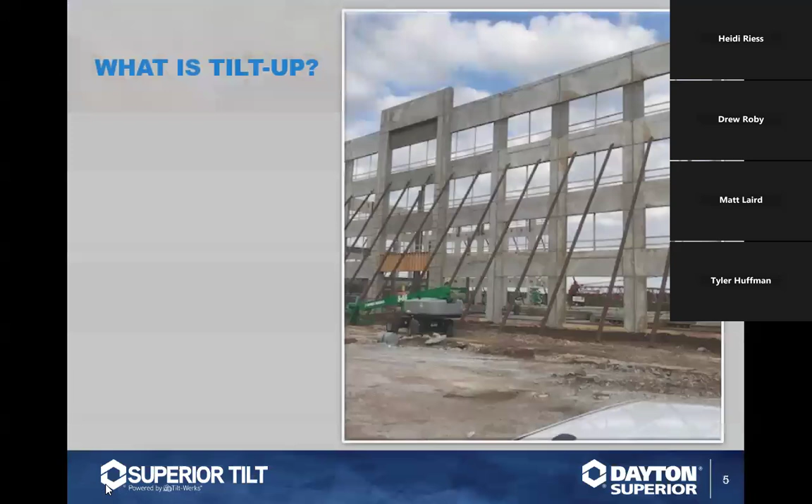All right, thanks Drew. First, let's take a look at what is tilt up. On a tilt up project, the wall panels are cast on site, and a crane is utilized to lift the wall panels to a vertical position and set them into place. This method of building construction offers both effective and innovative ways to build.

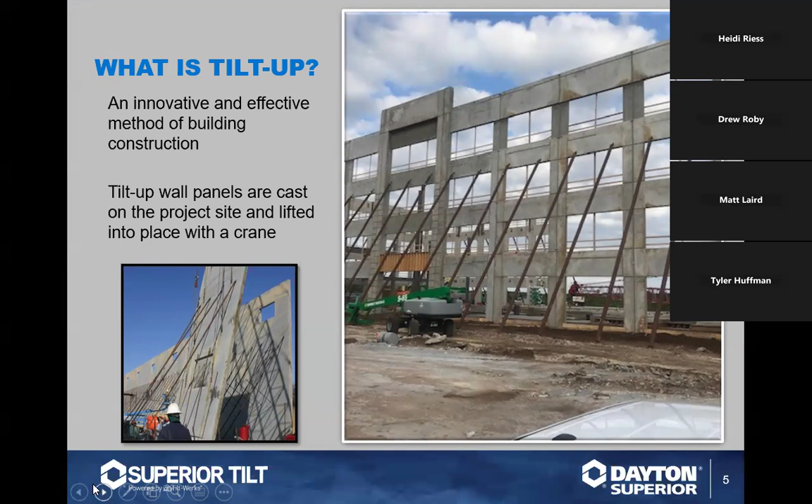Tilt-up method of construction can be used to build a large variety of building types. Generally speaking, tilt-up projects will typically fall into one of a handful of categories. These categories include distribution, manufacturing, churches, schools, and multi-story structures.

Tilt-up method of construction is a very popular choice for schools and educational facilities as well. This includes elementary, middle, and high schools, as well as charter schools and colleges or universities. And finally, multi-story facilities offer multi-use office and multi-use flex space.

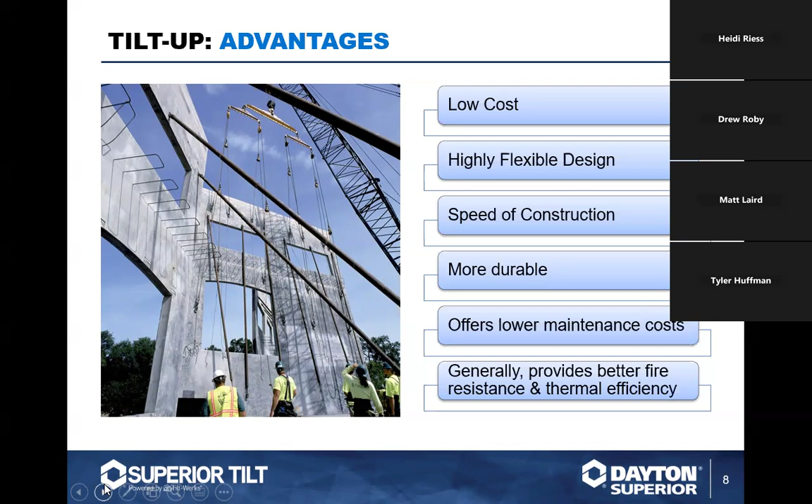There are many advantages for choosing tilt-up as a method of construction for a project. Some of these advantages include speed and cost, as well as design flexibility and overall durability of the structure. Buildings and structures built using the tilt-up method will generally provide a more efficient thermal rating, as well as increased fire resistance.

All tilt-up projects follow the same general process. First, the foundation and floor slabs are poured. If there are any temporary casting beds required, these will typically be poured at this time as well. After these items are poured, they are allowed to cure.

Next, the forms for the panels are built and bond breaker is applied. After the bond breaker is applied, the process of installing rebar, embeds, and inserts can be completed. Once these items are installed in the forms, the panels are now ready to be poured.

After the panels have been allowed to cure, the forms are stripped, braces are attached to the panels, and the wall panels are lifted and set into place. Once the panels are positioned in their final place, they can be temporarily braced off. Braces should remain in place until all required structural connections are installed.

Dayton Superior has been involved in the tilt-up industry for over 60 years. Dayton has been a major contributor to the Tilt-Up Concrete Association. Since the founding of the TCA in the 1980s, Dayton Superior has supported the TCA and continues its support and membership to this day. As the popularity of tilt-up has grown, Dayton Superior as a company has also grown.

Over the years, they have acquired industry-leading technologies such as AccuBrace, Tilt-Werks, and HK Composites. AccuBrace provides an engineered solution for bracing panels to helical ground anchors. Tilt-Werks offers engineers, architects, and designers a total and complete tilt-up panel design package. And HK Composites provide a full fabrication insulating system for tilt-up panels.

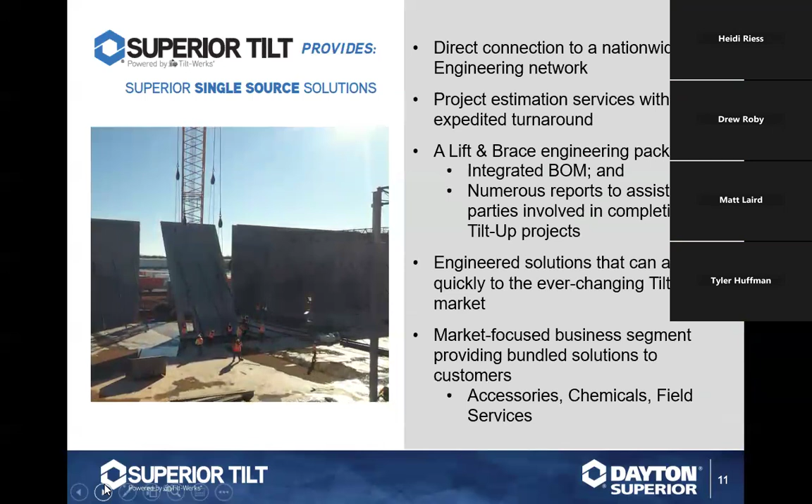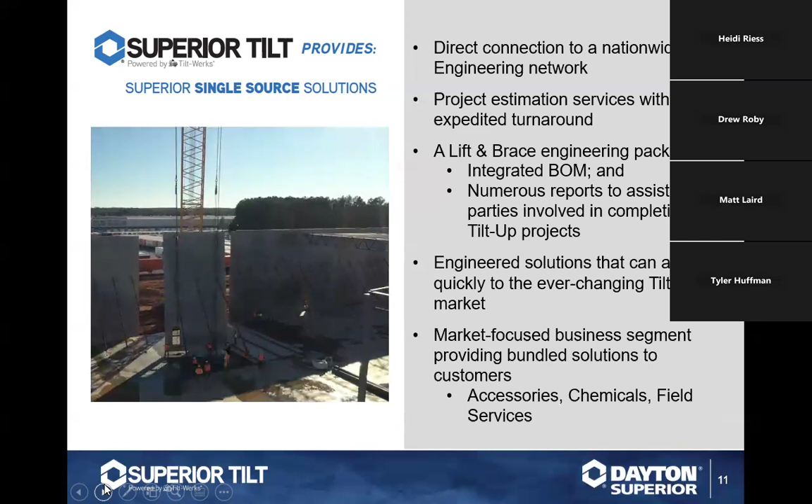The Superior Tilt Team offers our customers a direct connection to our engineering network. The engineering network can provide assistance from early bidding and estimating stages of a project and continue their support by providing a complete lift and brace engineering package. Again, the goal of the Superior Tilt Team is to provide a single source bundled solution for tilt-up projects, beginning with the estimating process, continuing through engineering and material delivery, and all the way through job site solutions and support.

A key component of the tilt-up process is the temporary bracing of wall panels. Wall panels can be as short as a few feet in height, as tall as 90 feet, or anywhere in between. To brace these wall panels, Dayton Superior offers our T14 braces.

Our T14 braces offer industry-leading capacities and are available for rental or purchase through Dayton Superior or one of our authorized tilt-up dealers. Dayton Superior can provide our authorized dealers hands-on training for both maintenance and inspection. This is going to ensure all braces rented or sold meet required specifications.

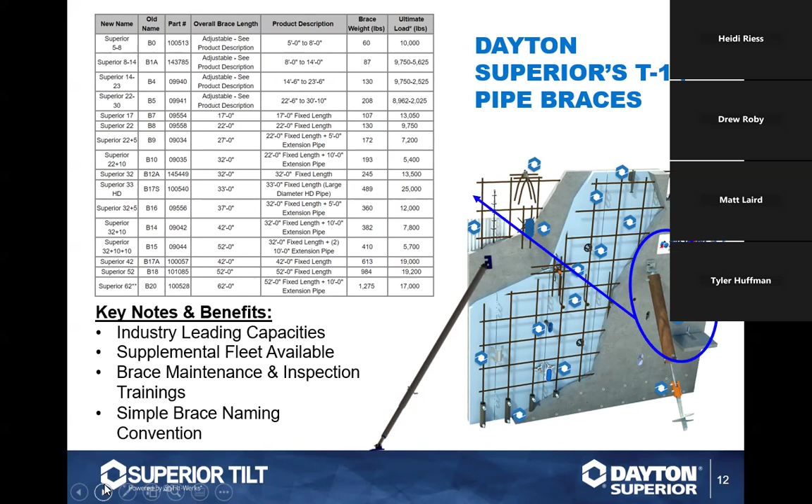An often overlooked component on the T14 braces is the wall and foot plate. These plates provide a connection point to the wall panel and the floor slab. These plates are often referred to as brace shoes.

Generally speaking, the majority of our T14 braces come with a standard one-hole wall plate. However, a two-hole option of the wall plate is available for some of the larger braces. The two-hole wall plate option allows for an increased ultimate capacity of the bracing system.

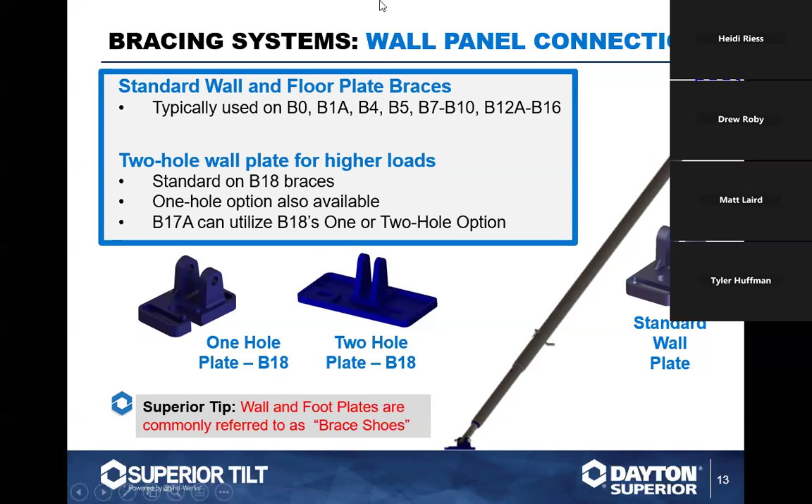Now, Tyler Huffman, Dayton Superior's technical sales representative in the Northeast, is going to talk to you about some more products from Dayton Superior's tilt-up portfolio.

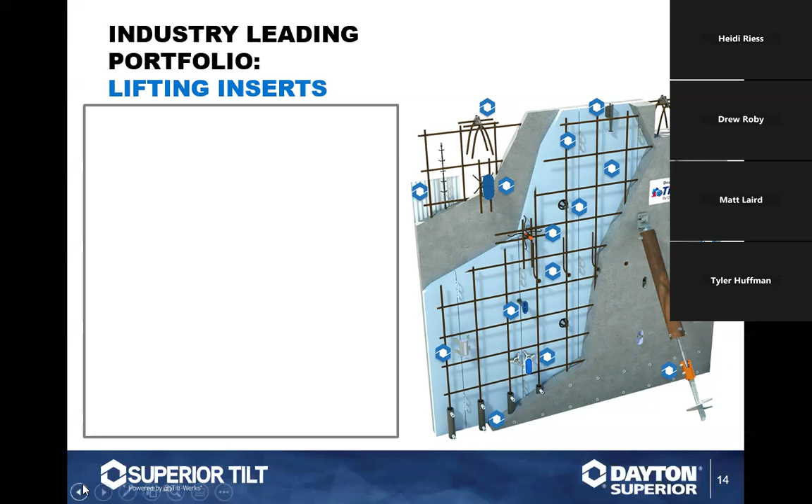Thanks, Matt. All right, first off, we're going to take a look at the Dayton Superior lifting portfolio. For tilt-up, you're going to have your two basic face lift inserts, and that is going to be the T110 and the T275. And then we also have the P92 FEW, that's going to be your edge lift insert. And these are all paired with the same clutch, and that is our T120 lifting clutch.

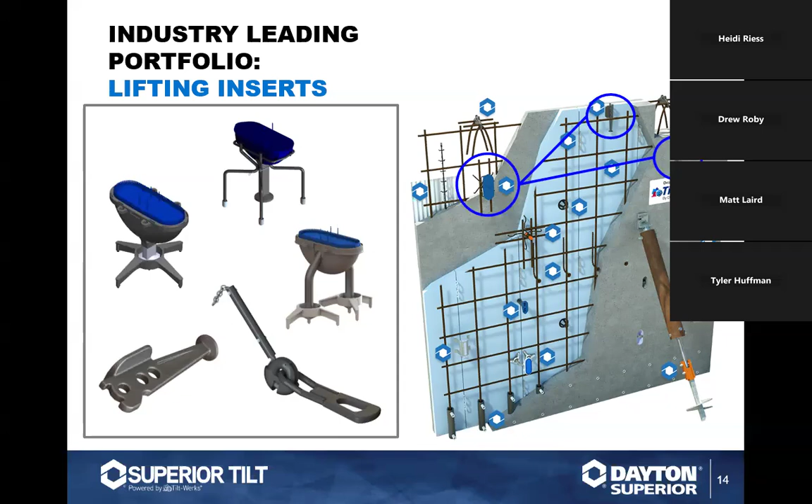Looking at the T110 and the T275, one of the things that makes the T275 pretty popular is its innovative void former. It's made of a plastic void former, so basically the gray part of the void former, or the bottom, is going to stay right in the panel. You pop the blue lid off, and this gives you a nice clean edge to slide the clutch in for lifting. And those are going to cover panel thicknesses of 7¼ inches and greater.

The T110, this is a single forged foot anchor, and that's got a 4-leg wire base. That has a plastic void former, easy to locate as well, and that's going to cover from 5 inches and greater. And that gives you easy tie-off points on the bottom of the insert to tie into the rebar.

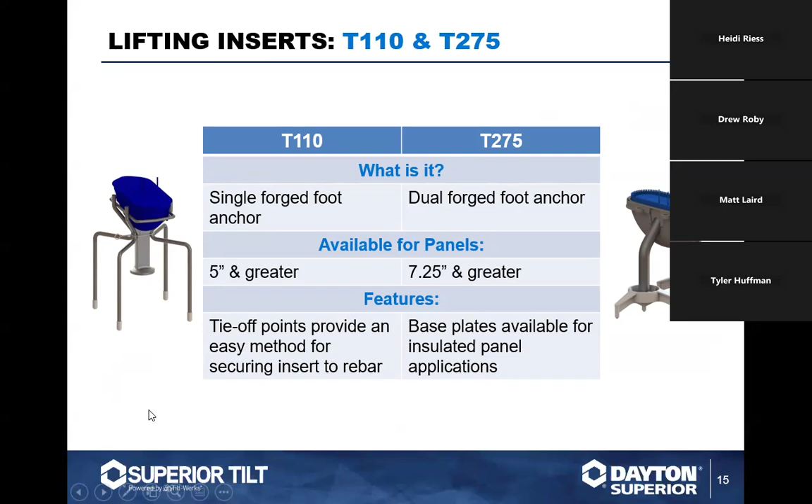Also, to pair with these inserts, we have the T275 patch cap. That's your oval patch cap, and it will snap onto either the T275 or the T110. We also have the P99P, a circular patch cap that can be used. The bottom photo shows a brace insert patch cap, which we'll get to in a little bit.

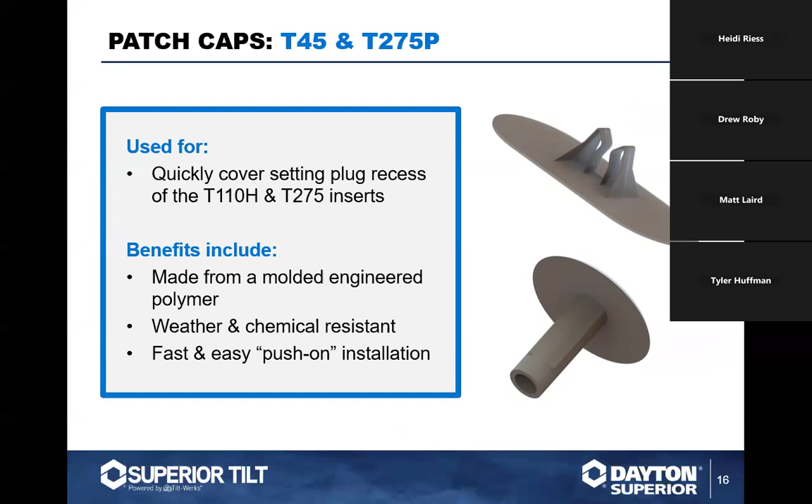The P92 FEW, your edge pick insert, is what you're going to use for edge pick or if you need to plumb set for a tilt-up panel. The design of this insert typically eliminates the need for a shear bar, and it's available in plain or hot dipped galvanized finish.

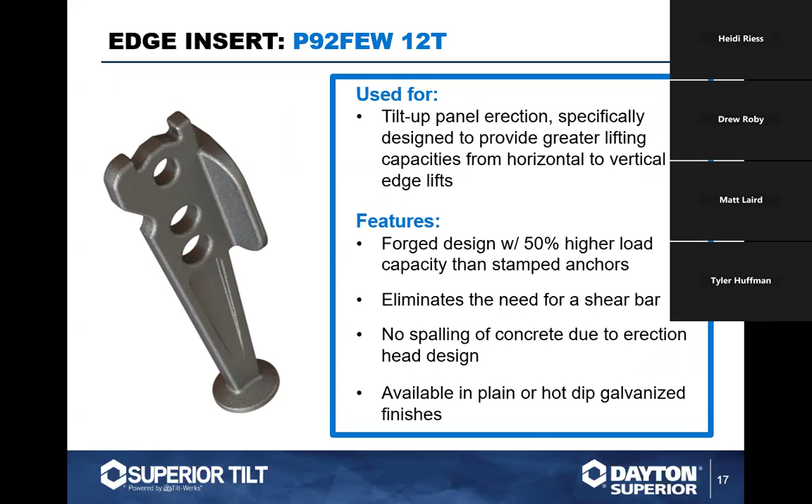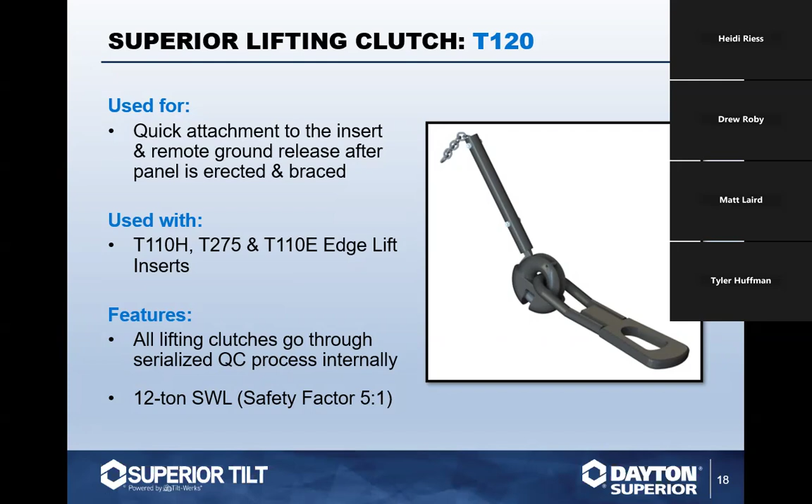Moving on to the T120, this is going to be your main lifting clutch for tilt up. It will handle all the inserts: T275, T110, and the P92 FEW. This is obviously a ground release clutch. These are also serialized and go through a very rigorous inspection process every time before they're sent out of our warehouses.

We'll move on to the brace insert portfolio. We basically have two main brace inserts. The first being the T6A Heavy, a 3/4 inch coil insert with an ultimate load of 28,500 pounds. This is furnished with a T21 locator plug, making it easy to locate in the panel, and these can be furnished with plastic tip feet or stainless steel feet on special request.

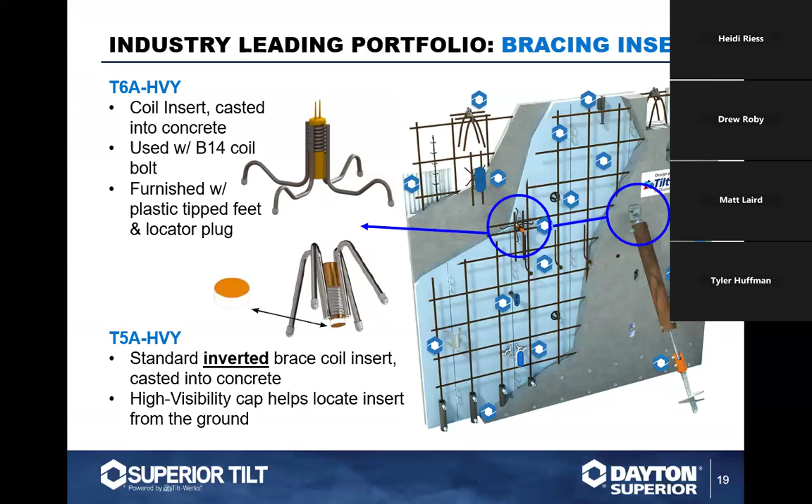Moving on, we have our Bearcat bolt. We offer a single-use Bearcat and a multi-use Bearcat bolt. The single-use has a silverish blue hue color to it, and the multi-use is more of a brass or gold color. It's an easy way to tell them apart.

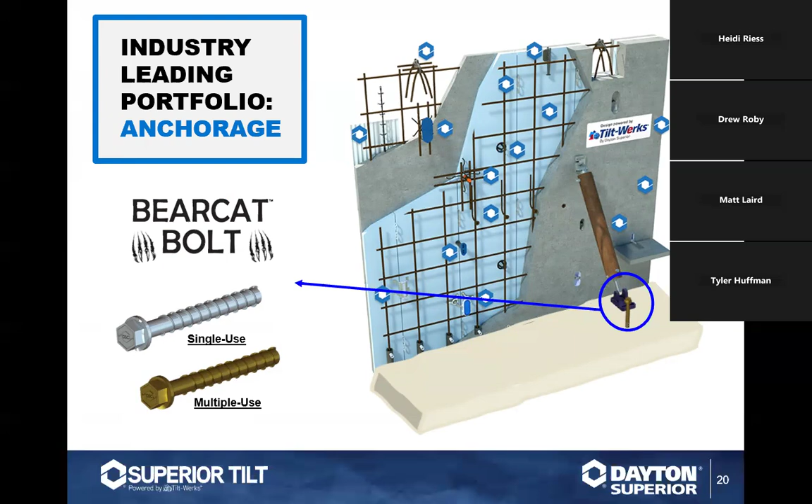We recently completed ACI 355.2-19 testing on these for cracked, uncracked, and seismic conditions, and all of those calculations are available on our website. The Bearcat bolts, both multi and single use, are available in 5, 7, 10, and 12-inch lengths.

We also have a thread depth gauge for the multi-use. If you thread it onto the bolt and the bolt does not protrude the bottom of it, those threads are still good. If it does show, then that bolt needs to be replaced.

We also have the classic T13 tang bolt, available in 4.5 or 6-inch lengths. Each kit includes the bolt, cut washer, and one tang, and this can also be used to secure braces to the slab.

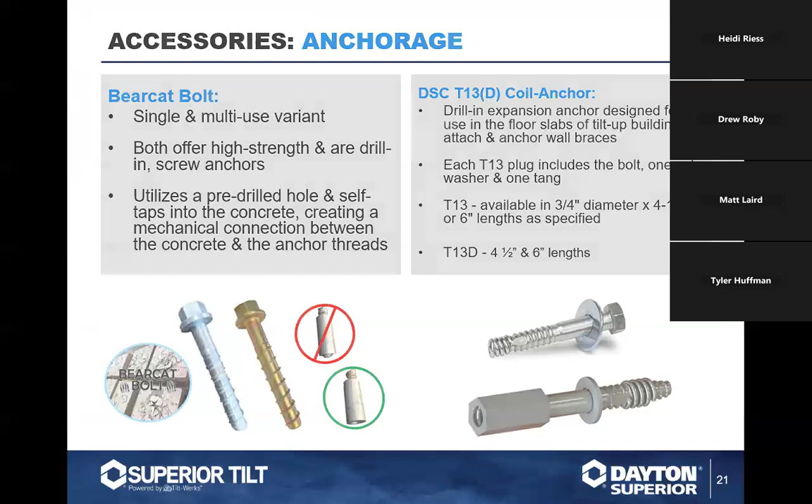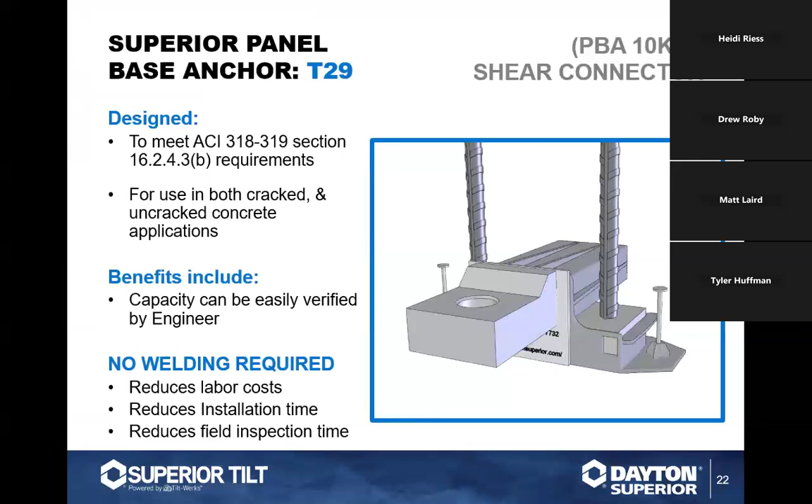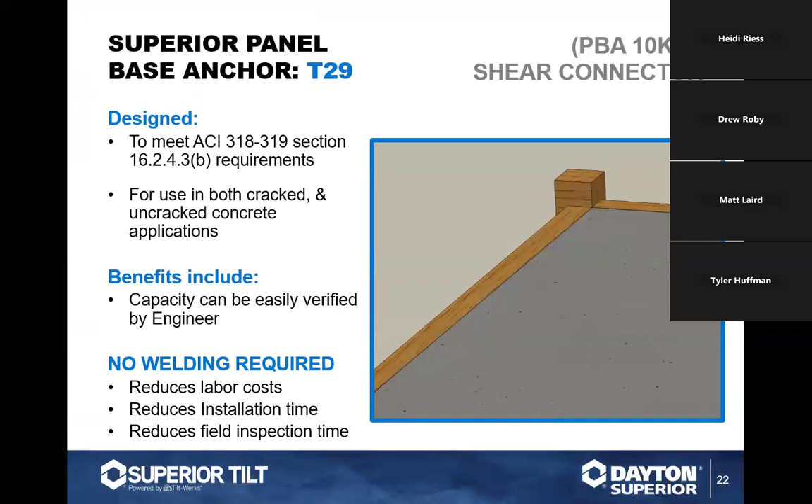Moving on, we have our T29 panel base anchor. This is Dayton Superior's version of a panel base anchor, a 10,000-pound connection. These are approved for seismic conditions A through F. As you'll see in the video as it plays, with the way ours is installed, it is a straight down anchor, so it does not compromise the rated anchor strength caused by angle installation.

There is no welding or patching required, and this utilizes our 12-inch Bearcat. These are sold as a kit - you'll get the void former, the bar, and a Bearcat bolt.

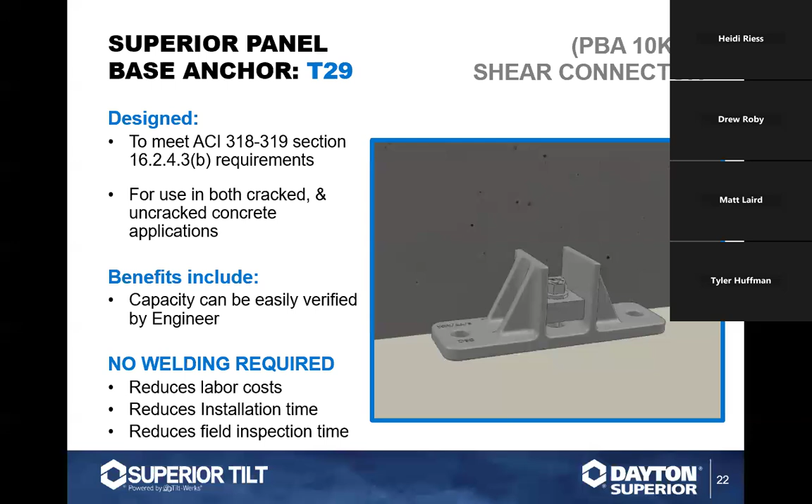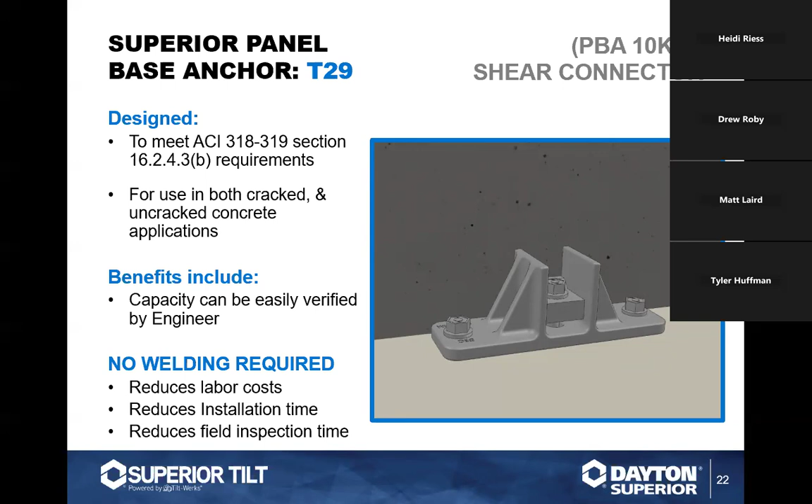If there is a need for additional shear capacity, we do have, as you can see now, the shear connector. That would require 2 more Bearcat bolts. This can reduce a lot of labor costs - as I said, there is no welding or patching required. It's very discreet and easy to install.

Moving on, we're going to get into some of the accessories we offer. Insulated panels are becoming a pretty popular thing as we try to keep up with environmental standards.

In January, Dayton Superior acquired HK Composites. We offer the CA tie, the four-prong tie, which is available for composite panels. And the ST tie is the standard non-composite panel connector.

We do offer full fab packages for these kinds of projects. That means when the insulation shows up on site, it's already cut to each panel as well as drilled or slotted for the ties. Basically, it shows up on site ready to go. You place it in the panel, put the ties in, and then pour your concrete.

We also still offer the Delta tie for composite panels and the Yeti pin.

Other accessories available include the Aztec EZ Connect PSB, available from heights of 3/4 inch to 3 inch, in 2.5 foot, 5 foot, and 10 foot lengths, along with the Aztec EZ Set Chair, which fits rebar sizes 3 to 10, with heights available from 2 3/4 to 14 inches in 1/4 inch increments.

Moving on, the Superior Plate Dowel system. This is a two-component system used to transfer loads at the joints of concrete slabs. We offer 1/4 inch, 3/8 inch, and 3/4 inch systems, color coded per size, typically spaced at 18 inches along the joint.

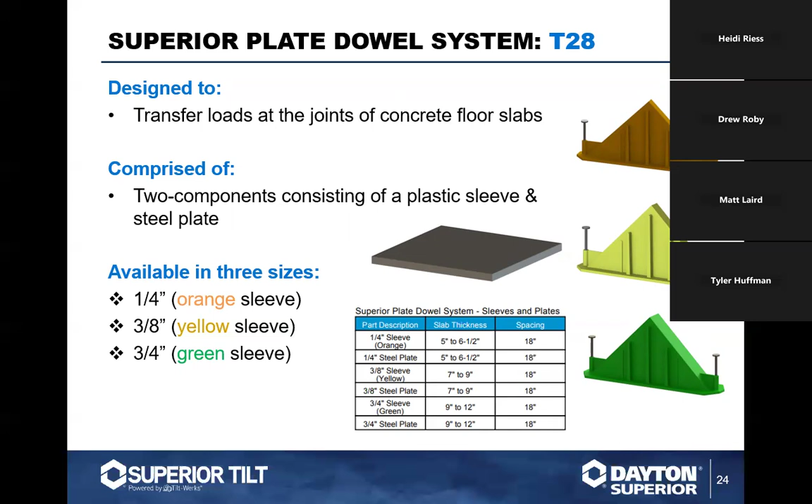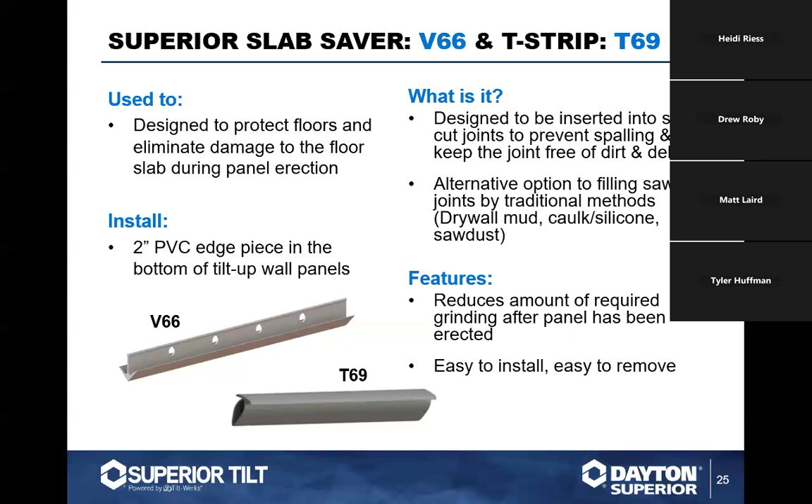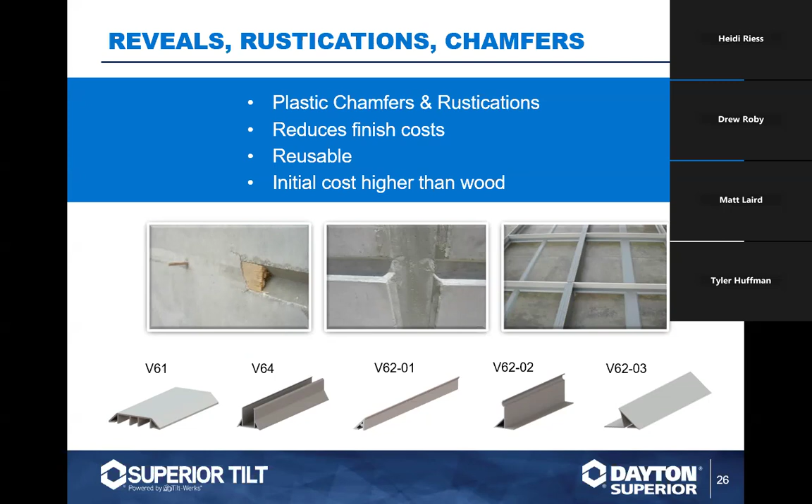We also offer all of your basic reveals, rustications, and chamfers, from your typical reveal bands to window edges and door edges. The initial cost is a little higher than wood, but if you think about it on the job site, if you're using wood and the weather gets like it has been lately with all the rain, that wood may get a little bit deformed and not be great for straight reveals on your panel. So this is just one way you can combat that with these kinds of reveals.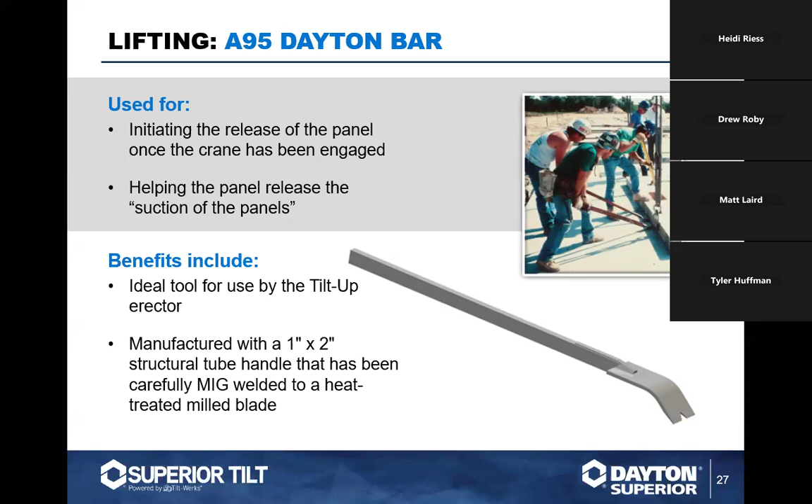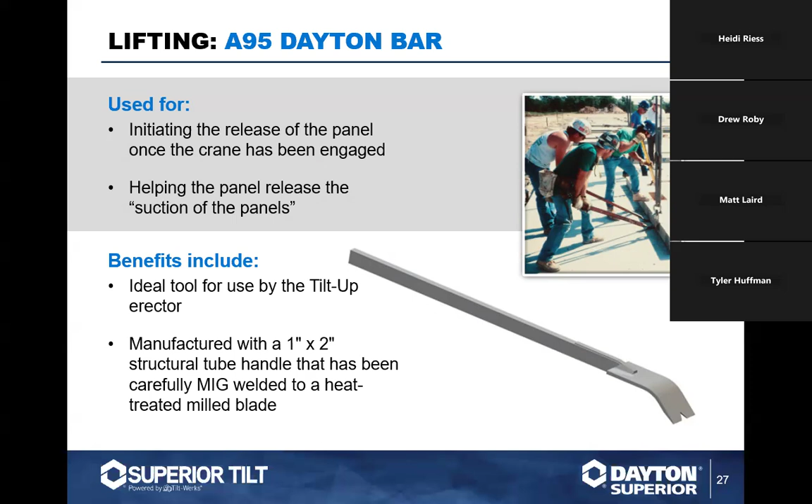The A95 Dayton bar is used to initiate the panel suction, the initial suction that happens when lifting the panel. These are manufactured with a 1 inch by 2 inch structural tube handle, and we have them available in the standard 3 inch blade or special order 5 inch blade.